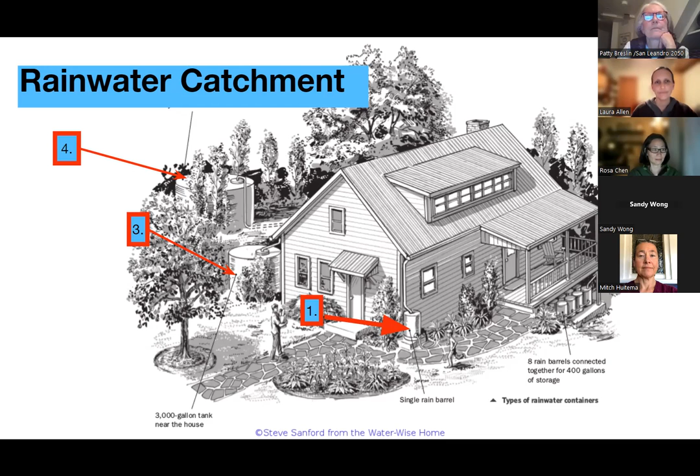Now the rest of my portion of this is to share with you the resource of greywater. Greywater is a great source of irrigation. Our landscapes usually use about half of the total water. Of course, that varies depending on the house and the landscape, but generally speaking, we use about half the water inside and half outside.

So greywater comes from washing machines, showers and baths, and bathroom sinks. In California, kitchen sink water is not considered greywater, though in other states like Oregon and Washington, it is considered greywater. So that's just kind of a weird little thing about greywater.

But for you guys to know, you cannot get a permit in a reasonable manner for a kitchen greywater system, but you can get permits - or you don't even need permits for some of these systems - for all the other sources of greywater.

So I'm going to talk about some general facts about greywater before you see a system, and then after that I'll go through the steps to design your own. Next click, there'll be some bullets coming up.

Okay, so the first fact about greywater: it's a vastly underutilized resource. In California, people collectively discharge about 1 billion gallons of it every single day. So it's a huge quantity of water that could really be utilized to offset our demand on other water sources.

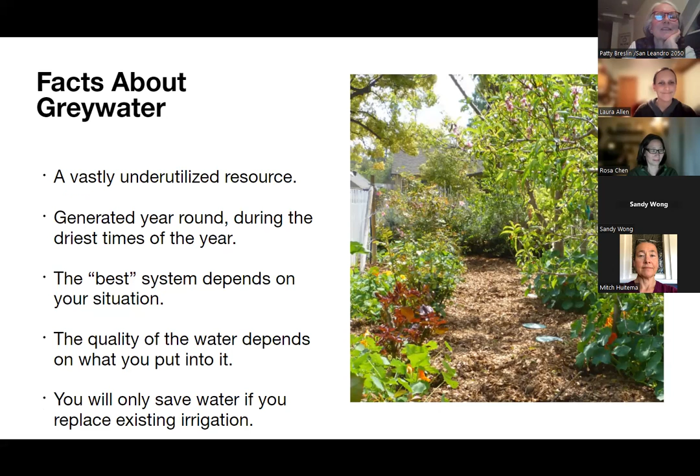Next slide. Oh sorry, I don't know what's going on here. Hang on. That's it. Okay, so is this right?

Yeah, that was the general info. Now, this is the general system.

Now we're going to have Rosa jump in here and talk about her experience. Hello, hi, I'm Rosa. I live in the north part of San Leandro, and I'll provide the resident experience on greywater today. Please take everything I say with a grain of salt, and listen to the greywater expert Laura on this call.

We have 3 greywater systems watering 2 fruit trees and an ornamental tree in our backyard. I'll go into each system in more detail shortly. They were installed by contractors in the last couple of years as part of larger home improvement projects.

Some were planned projects, others were little problems that turned into bigger projects, like a rotten board on the deck and a plugged up sewer system. I've had a great interest in greywater for a long time and have had many years of planning, with lots of links and Pinterest things I've been saving. So I had a pretty good idea of what I wanted when the time came. Next slide, please.

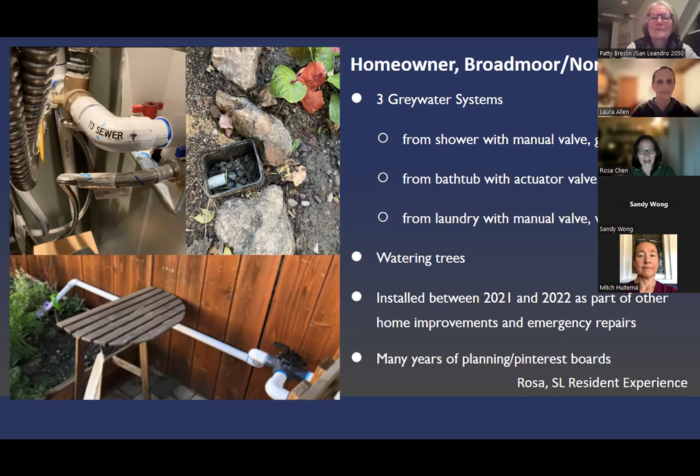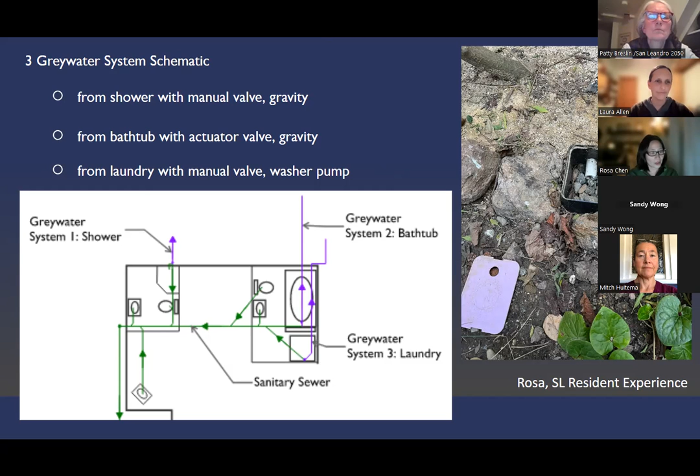This first system I call shower to landscape. You'll see in the picture that the shower is just on the other side of the wall where the pipe is coming out. It's not super convenient if you have to switch from landscape to sewer, but we only do that when we clean the shower, which probably doesn't happen as often as it should. The pipe closer to us on screen is the one coming out from the shower drain, then it turns and goes right to the sewer.

If it goes to the right, that's a sewer. To the left is where the planter is at. Depending on the position of the valve, you'll see that we actually use the pool valve - that's the gray and black one you kind of see in the picture. We also have an extra valve that was just a mistake, but we usually have it in the open position all the time since we want to water that area.

Also of note is that we have a pretty robust hair drain catcher in the shower, so that doesn't get plugged up. We only had the system for a couple of years, so I'm not sure how well that works, but so far so good.

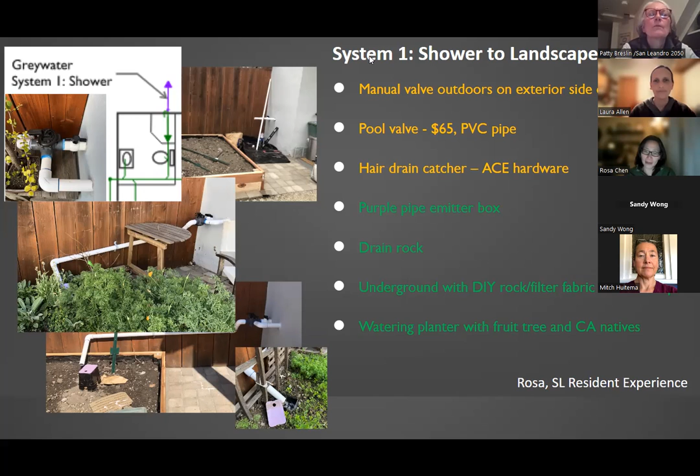Then on the landscape side, we have the purple box where the water dumps into. We filled it with drain rock, and then I made a gravel sock - that's like filter fabric wrapped around gravel or rocks - and it kind of spreads out the water in our little planter there. We have a little plum tree in there and a bunch of California native seeds, and they're growing really well.

Now this project was part of a bathroom remodel, so we spent maybe $600 on labor and another $100 for material, but it's not super accurate because it was part of a larger project. If you do it standalone, it'll probably be more expensive than that.

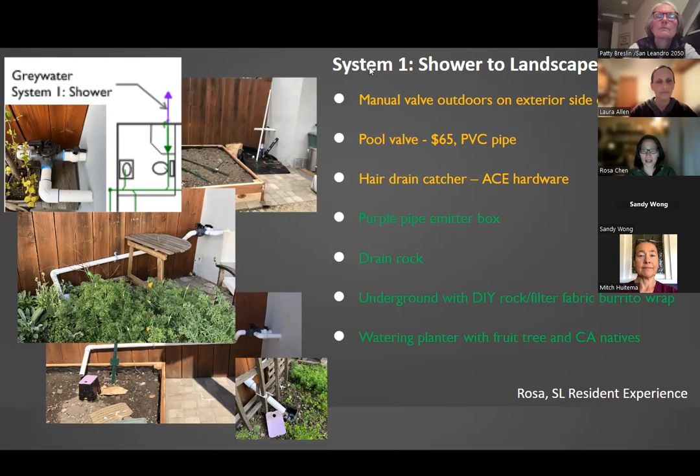And then our next slide is our next system - that's our bathtub to landscape. That's the one where we have, oh next slide please, where we have the valve under the house.

Our house is a little bit raised, so there's a little bit of a crawl space that's maybe 3-4 feet, so it wasn't too awful, but we had a contractor do it. So that actuator valve itself is under the house. On the right-hand side of the picture, you'll see that's the switch inside the bathroom. Again, we have a fancy hair drain catcher on our bathtub.

And then on the outside, the pipe comes out under our wooden deck and then continues underground until it goes to the root ball of our nectarine tree.

Again, we covered the stuff with rock, mainly because we had extra rock from another project, and that's in case we dig around there so we know there's a pipe there and don't break it by accident. We also have the purple box to mark the exit location, and then planted like a seep monkey - like a California native that likes water nearby.

Again, this was part of an emergency sanitary sewer fix when our sewer plugged up. So maybe it was $1,000 for labor and material, but again, part of a larger project. It did involve a little bit of electrical work because of the actuator valve.

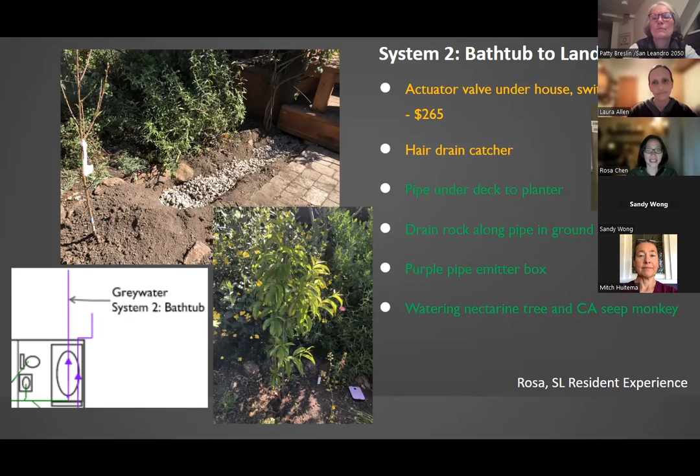Okay, and then the next slide, that's the laundry system - laundry to landscape. That's probably the most common one you'll see, since it doesn't require any permits and can be done DIY a little bit more easily. But again, we didn't do it ourselves.

There we have a manual valve in the laundry room - you can't see it in the picture. Ignore the metal pipes because those are mostly for water and the electric water heater. But anyway, you'll see there's a brass valve with a yellow handle. I say natural gas because that's usually for natural gas, but you can use that valve for this as well, I think. There we also have an auto vent, which is that little black thing sticking out on top. That usually goes in the highest part of the system so you don't get any plugged water.

The gray hose is coming from the laundry machine. That's usually lower - I just raised it up so you can see it better in the picture. So anyway, that's on the inside. On the outside, the pipe comes out of the house. The lower left picture shows it when it was first installed - they just had the pipe come through our stucco wall. Then they cut it, put an elbow, ran it alongside the house, and then it went underneath our path.

I was going to then take it and branch it out to the various fruit trees, but I never got around to it. So it kind of just lives in the box and waters the potato bush tree thingy that we have over there, and we planted some other plants that can handle the water.

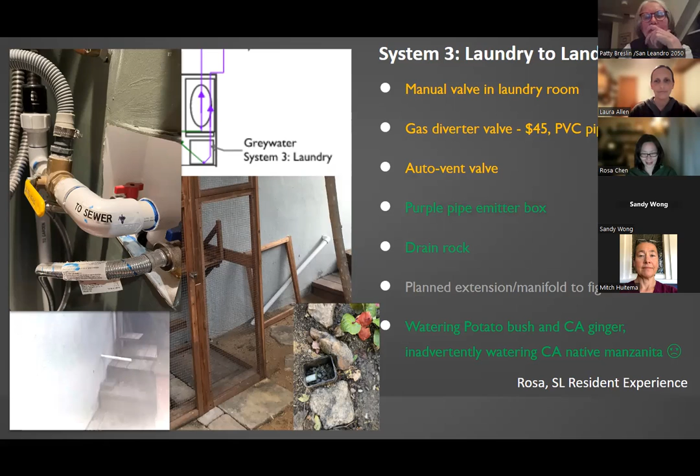So anyway, in terms of the cost, again it was part of a larger project - incremental cost was maybe $600, but again probably more if it's a standalone project. All right, then the next slide is just considerations for installation.

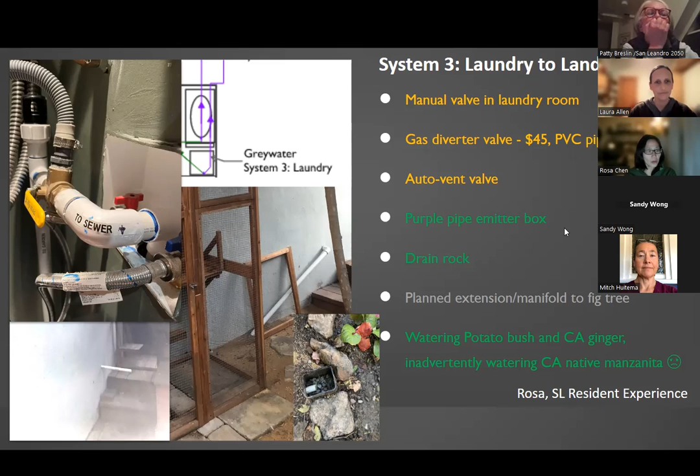So the next slide asks, what type of system works for you? We obviously did the laundry and the shower. We also looked into having our sink connected to the toilet, but that didn't end up working out for us because we actually have a pedestal sink and no good place to put it and make it all work. So we didn't move forward with that.

Other considerations are location of your drain versus what you're watering, access to your pipes, how tall is your crawl space, and do you have enough fall to get to the outside—do you need a pump, or is it just gravity?

Other considerations are the plants—where you need water and when. Since our yard is mostly California natives and they're pretty established, most of our plants didn't really need the water. If you have a fruit tree, that worked really well for us. I think fruit trees benefit the most in our particular yard, just because of our choice of landscaping. Also, we did most of our work when there was a big supply chain issue the last couple of years, so we had a really hard time getting hold of valves.

We did find a great resource, waterwisesupply.com, that had all kinds of bundles of gray water stuff you could purchase directly. I spent a lot of time at Home Depot getting super frustrated because you couldn't find anything, and you couldn't order anything online easily. So I put that link in as a good place to find stuff.

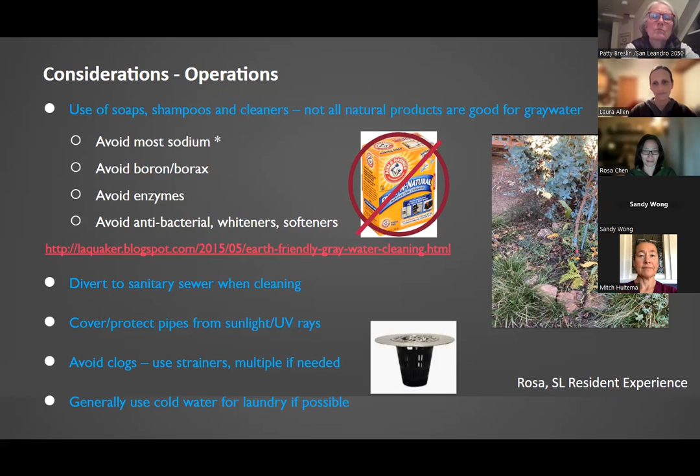I have one more slide. Before we had our gray water systems, we used buckets in the shower to catch water while it warmed up, and rinse water, then carried it outside afterwards. I've seen folks online do that with a siphon from the bathtub through a window, using aquarium hoses, but we never got to it. Anyway, there are other ways of doing it if you're not ready to put in a whole system.

Even now with our systems in place for the sink water in the kitchen, we use the rinse water for washing salads and then water the plants indoors, and usually go out to the porch and water those plants too. We usually stack our dishes in the sink.

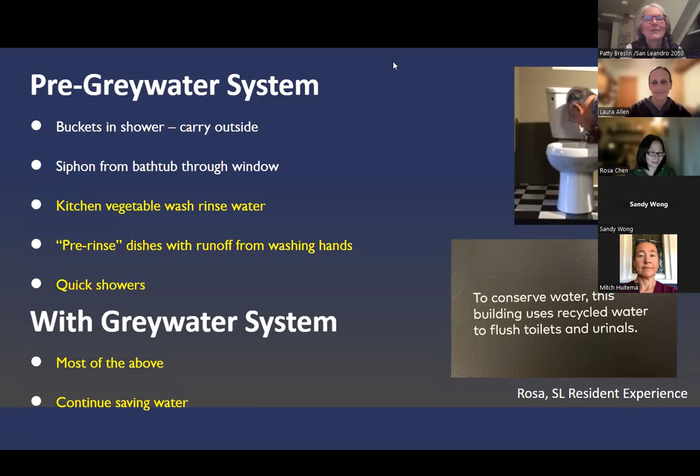Great, thank you. Okay, so Laura. Yeah, I love seeing people's gray water systems. Thanks, Rosa, for sharing.

So I'm going to take a step back and be very general, with considerations that all of you will go through, knowing that your particular site is going to be unique. There's basically 5 steps that can help you have a successful greywater system.

So the first step is to understand your options. I encourage people to focus on what I'll call the tried and true systems. Greywater is just water - we have pipes, valves, and fittings, and there's many ways you can get water from point A to point B.

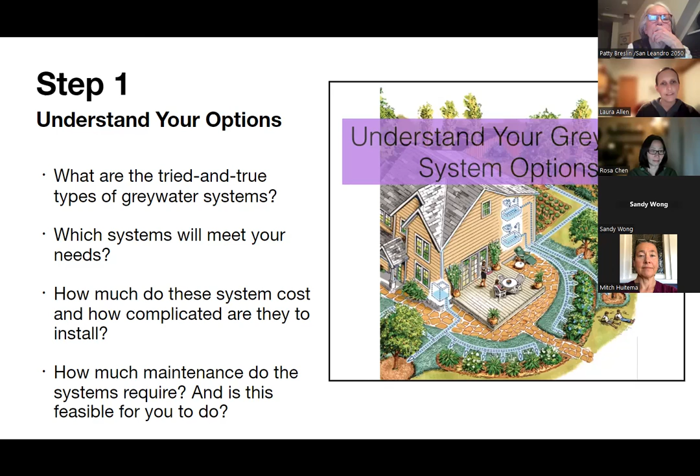The first system is the laundry-to-landscape, and Rosa mentioned that. Currently there's no permit required in California - there's some basic health and safety guidelines you have to follow, all very doable, and you can often get a rebate. Sometimes it's small - I believe East Bay MUD gives like $50. Some communities give much bigger rebates, like Marin Water, and so was San Jose. So you can always ask for more if you're not happy with your rebate size.

Basically, you're taking your laundry machine - it has a pump in it that pumps out the water - and instead of just pumping it right to the sewer, you intercept that water with a valve, which allows you to control the flow.

So one side of the valve directs back to the sewer where it used to go. The other side directs out to the landscape to your new greywater irrigation system.

This image is just showing you a schematic. It's coming out of the wall. You might be able to go through the floor, into your crawl space, but you do have to be able to get outside. It can go on a flat yard, it can go on a downward sloping yard, but it can't go up a hill. The pump in your machine is not super strong, but it is strong enough to move water, usually about 50 feet across a flat yard.

Then you have different points where the water is distributed. Maybe you have just one point if you have a thirsty plant right there, but most people have several outlets to direct the water to, so they're watering more of the landscape. And that's kind of about it.

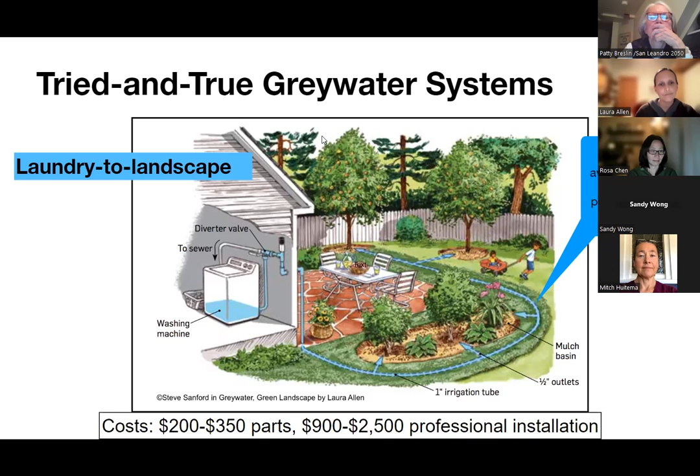Next, the next kind of system is a gravity flow system called a branched drain. In Rosa's site, she just had one outlet, and this is a variation of that where the water comes to one point, but then it's divided into two different flows of water, and then it can be divided again, so you can have multiple outlets. To decide how many outlets you need, it's based on how much water your home produces and then how much irrigation needs the plants have.

So there's a little bit of calculating that you do with the greywater system, so you have a good match. You look at your greywater coming out of the home, how much do the plants need, and you want to match it up. Sometimes it matches up to one plant or one location, often it matches up to multiple plants, multiple locations. But this system, it's all distributed by gravity, which is really nice. There's no moving parts, nothing to break. The water just flows out and goes into these subsurface basins to irrigate the roots of the plants.

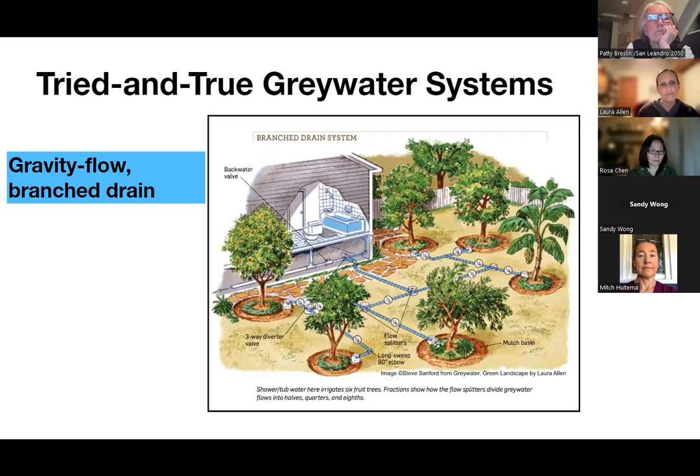Anytime you're pumping gray water with an external pump, that also triggers a plumbing permit or a gray water permit.

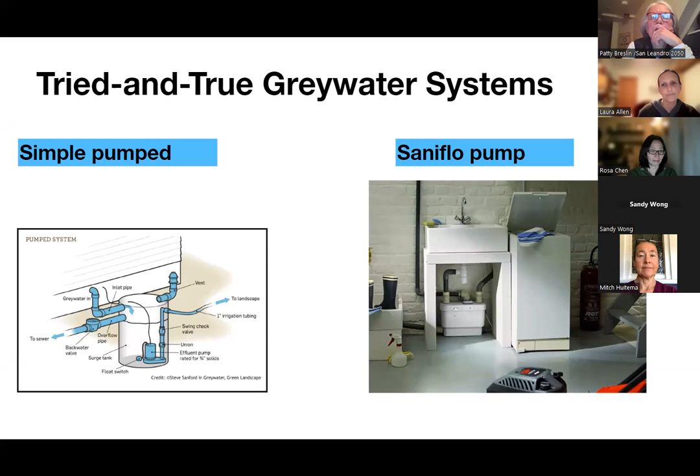Then there are systems where you pump the gray water and filter it before it gets into the landscape. This costs more and is more complex, but gives you the flexibility of using special drip irrigation tubing. If you want the gray water to function similarly to your other types of irrigation, like drip, you do have to filter it because unfiltered gray water will clog any small opening. These specialized drip systems aren't standard drip tubing, they're made for dirtier water, but function just like the drip tubing you're probably familiar with. For yards that need that type of irrigation, it's definitely suitable.

I do encourage people to only use a filtered system if they really need to, because it has additional cost and the filters need to be cleaned. It's much more prone to failure because people don't always clean their filter. You can get a maintenance contract with someone else to clean it, that can work. But left to our own devices, we humans don't always do regular maintenance for the long term. So just be aware of that if you're interested in filtered gray water systems.

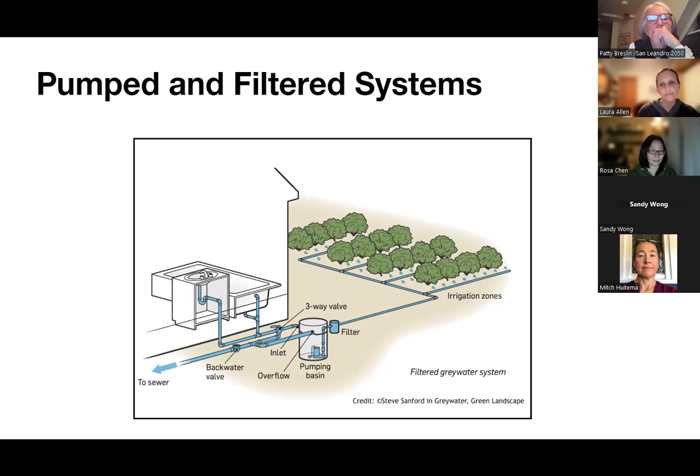There are other types of systems that are more like whole house systems, typically installed in new homes or major remodels where all the plumbing's being redone. Two companies: Water Lab is a Bay Area company whose installation arm is called Water Sprout, and they do high-end new construction. They take all the gray water and send it to a sophisticated system that filters it, sends it out, and is able to monitor it. If the system runs out of gray water, it can pull in another source, maybe a rainwater supply, and if that runs out, it can pull in municipal water.

The cost is significantly more expensive, in the $10,000 to $20,000 range or maybe even more. So you've left the couple thousand dollar range and now you're in the $10,000 to $20,000 range, but they have a lot more capacity. The other company, WaterReNu, makes a mid-range system that's similar. You can monitor it on smartphones, and it filters and has an automatic way to clean out the filter. If you're interested in a whole house, higher-end type system, these are two you could start looking into.

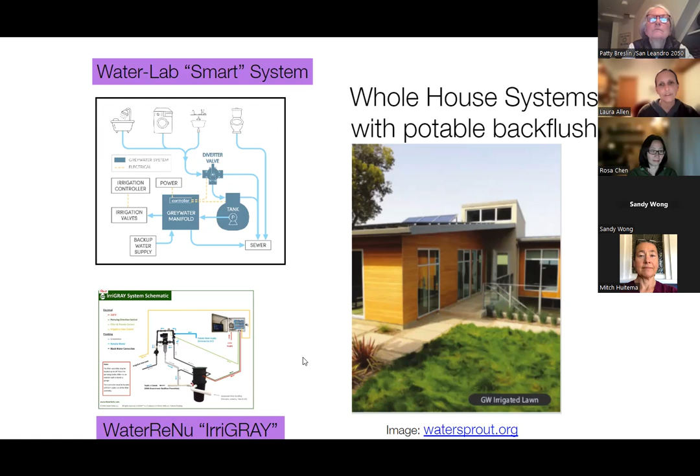So those were understanding your options. I want to clarify that no matter what gray water system you have, whether filtered, fancy, or really simple, none of the systems will take out things that could be harmful to your plants. So you need to think about your products no matter what kind of gray water system you have.

Luckily, it's really easy to make your gray water plant friendly. You just need to avoid salt, high levels of salt. You can have a tiny bit, but avoid powdered detergents because those are full of salt. Avoid boron too, a plant toxin that can harm your plants if it builds up in your soil. You don't want chlorine bleach, but vinegar or hydrogen peroxide bleach is fine. There are lots of other things you can use, and you can always reroute your system to the sewer when you need to do something that's not good for your plants.

Just to be clear, if you do it one time or two times, or probably even ten times, you're not going to see any impact. It's the regular use of these products over time that matters - if they build up in your soil, they can harm your plants. So you want to make sure you have safe products that are going to be used on a regular basis. You don't need to stress or have anxiety about occasionally using the wrong product, or someone visiting and using the wrong product once. I would caveat that with hair dye or hair bleach or something really harsh - you don't ever want that going out your gray water system. But the general products, on occasion, not a big deal.

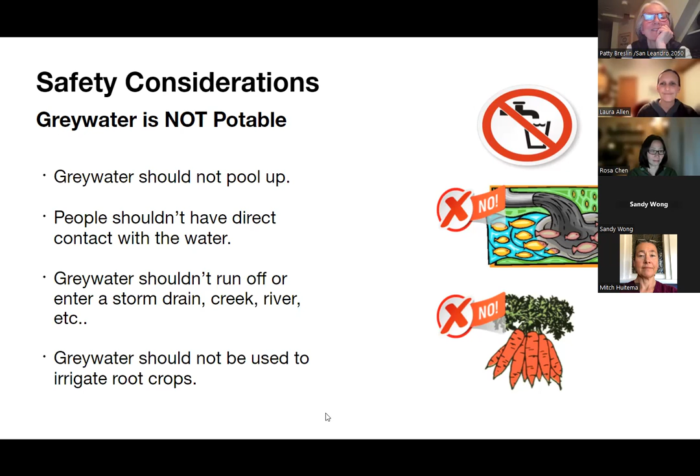Next slide. Oh, I think you already did that, right? Oh yep, okay, next slide. Yeah sorry, I didn't realize I had it written.

So those are kind of understanding your options. Now we're on step two, looking at your site. Briefly, the slope of your site has an impact, whether it's uphill, downhill, or flat. The plants you want to irrigate will impact it too - bigger plants don't need filtered gray water, but if you have a lot of really small plants over a wide area, you're going to need to send it through a drip system. Your soil matters too - if you have very slowly draining soil, you're going to need to distribute the water over a larger portion so you don't have pooling of gray water.

Your plumbing sometimes impacts your options. If you have slab on grade construction, your shower pipes are literally buried in cement and it's not easy at all to get to them. So sometimes you might find out some of your gray water sources are just infeasible for your particular site, or maybe you can do them all - it just depends on your home.

So now you're ready to choose your system. Laundry to landscape - I encourage people to start with looking at that, seeing if it's going to work for them, because of the ease of installation typically, and it's very flexible. Then there's the gravity flow systems, if you're able to do them. You might need to pump the water - simple pump systems work really well. Pumped and filtered ones can also work with proper maintenance.

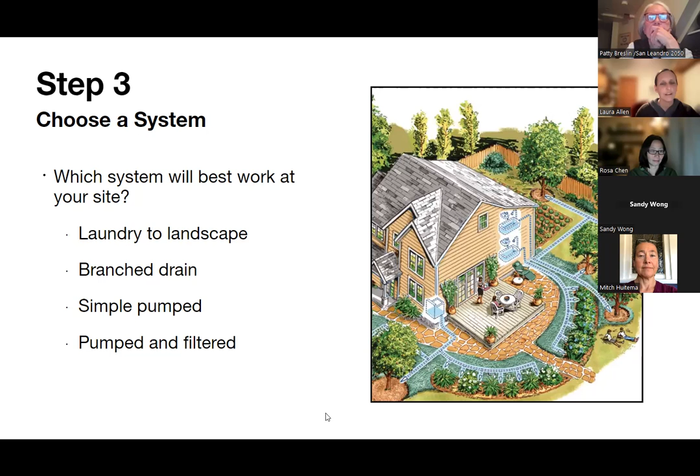Then you'll design it.

With the design, this is where if you're doing this to save water, you don't want to rush the design process, because to maximize your water savings, you want to figure out how much water your home produces and how much your plants need, and then match them. Sometimes regulations impact your design depending on if you're getting a permit or not and where you live. And you always want to think about health and safety requirements, so make sure your system is going to be safe for everybody. If you're getting a permit, following the code, or following best practices based on resources, then your system will be safe for you and the environment.

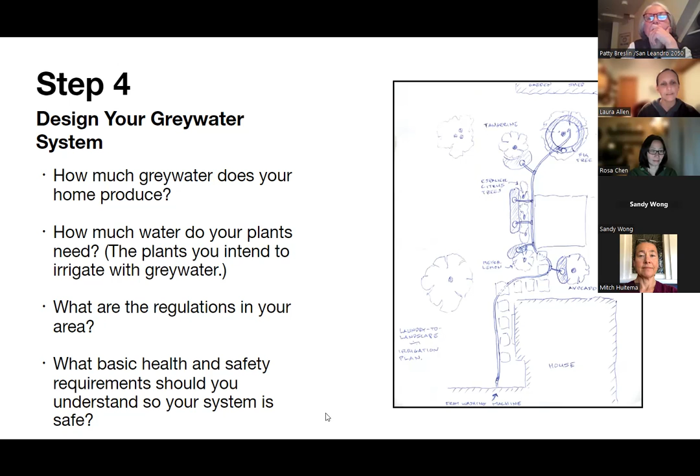So now you either build the system yourself or you hire somebody.

Make sure you understand the skill level required depending on what system you want to put in, and know where to go for parts. Some of them do need to be ordered, so if you're doing this yourself, time it properly so you can get the parts you need. And if you're working with a contractor, I really encourage people to be clear about what you want. I've seen many times contractors think they know what to do, or maybe they've done this once and aren't particularly greywater experts, and they convince people to do something that's actually not the best idea. So educate yourself in general terms and make sure you can communicate that to your contractor so they can build the right system for you. You can always share resources with them, books, diagrams, there's lots out there. But just because they're a contractor doesn't mean they're necessarily the most knowledgeable about this particular type of system.

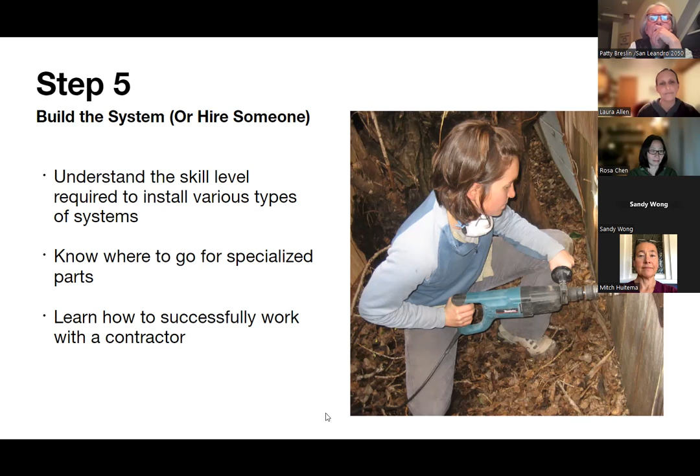So here's some resources. Greywateraction.org is the website, and we have lots of links to other things there, plus online education. I've written a couple of books to help people install these systems. Greywater Green Landscape is one just targeted at greywater, and that's a great thing to share with a contractor if you're working with someone else, or if you want to build it yourself. It takes you step by step through the design process and installation, and there's a lot of resources. Locally, the Urban Farmer Store is a place you can get many of these parts, as well as Waterwise Supplies, I believe it's called, to order. And right now you can get a $50 rebate from EBMUD.